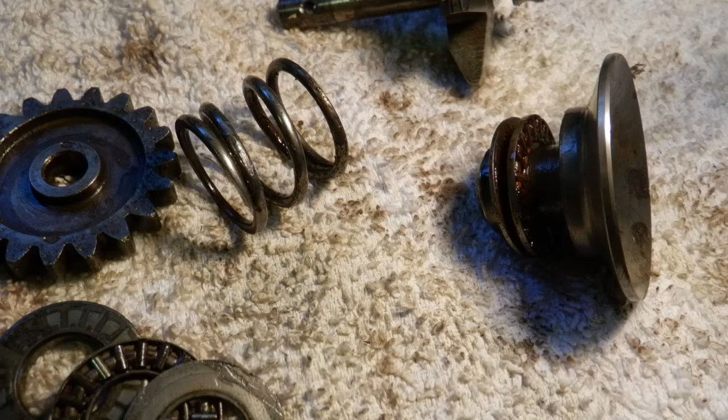This is a bad governor. I'm going to show you how the bearings are assembled.

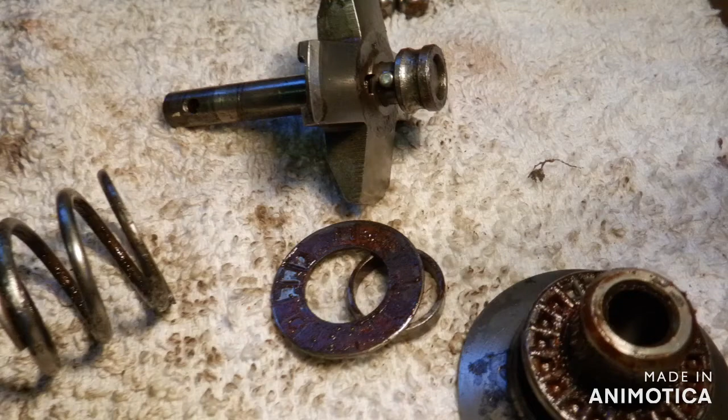So just bear with me here. Okay, so that side faces out. This is the more solid looking surface. Then you have a washer, then you have a collar. So that's more or less what it looks like. Over here, this is a bad bearing.

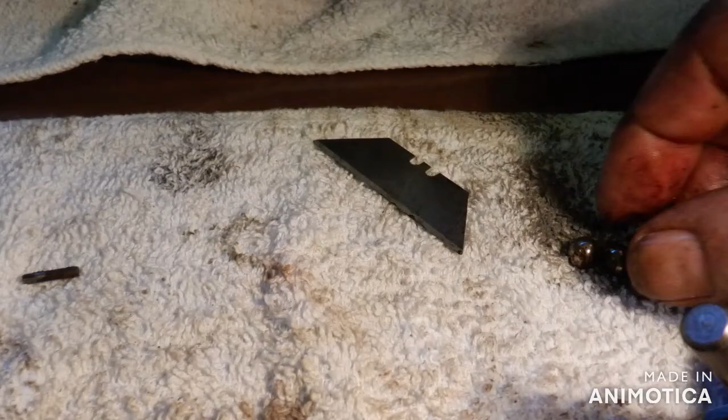Got that pin. You have this guide, and down there is a rubber O-ring, which you probably can't see. See the O-ring? And then these ball bearings go in there. There's your picture. See? O-ring, one ball bearing in each slot.

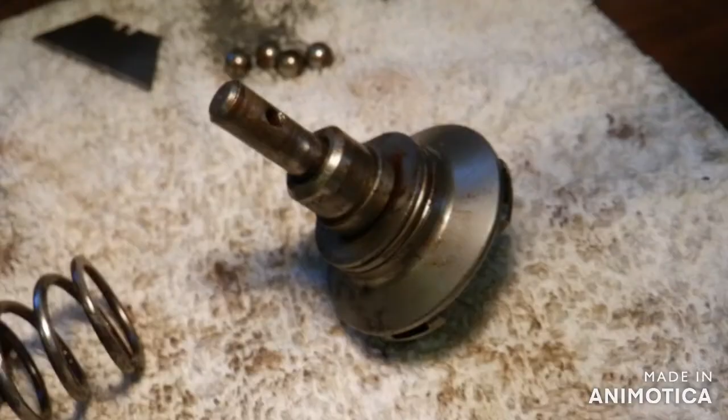Okay, so that's the result so far. Then you place on a washer. See the surface? We're going to face it the same way as that one. So the bearing surface here, most waffled surface is here. And we put on the collar.

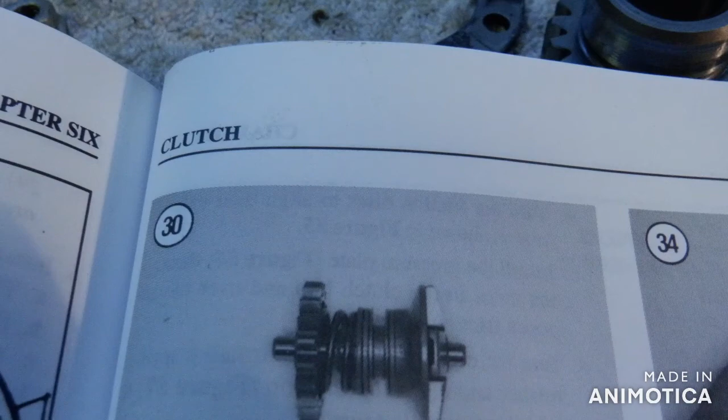Okay, and that's the result. If you look at yours, it should look like that. Alright, then we put on the spring, and we put on the gear, obviously with that end out, so we can put the pin in.

Okay? So here's some instructions.